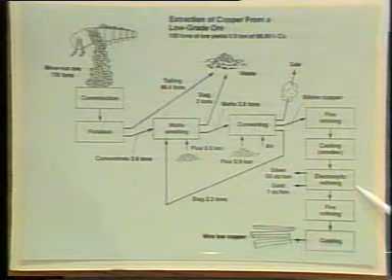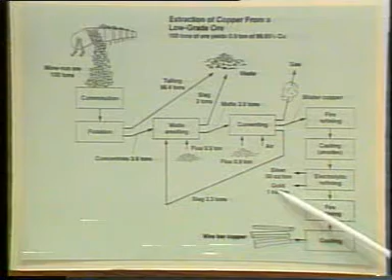An electrolytic refining plant may be as big as an acre. We hang anodes in sulfuric acid containers, and between each one we put a starting sheet of pure copper that we've gotten down the line. Then we pass a current through it, and we get plated from the anode, which is impure, to the cathode, now pure copper. In the process, we drop out all the noble metals, the selenium and the tellurium - gold, silver, platinum, palladium, rhodium, iridium, selenium, and tellurium.

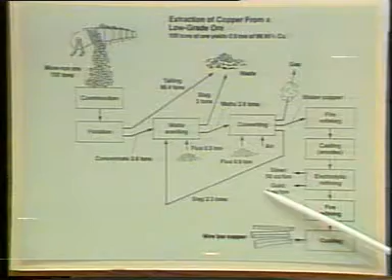When ASARCO used to have its plant in Baltimore, they used to refine about 400 tons of copper a day, and out of that 400 tons, they got enough selenium and tellurium to pay for the operation - or at least so they said. At that time when gold was selling for $35 an ounce, they still got $18,000 worth of gold out of each 400 tons, plus lots of silver and other nice things.

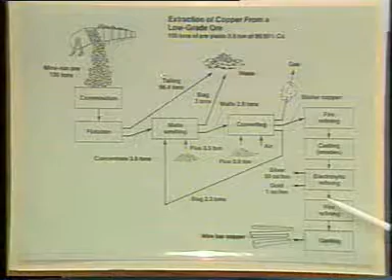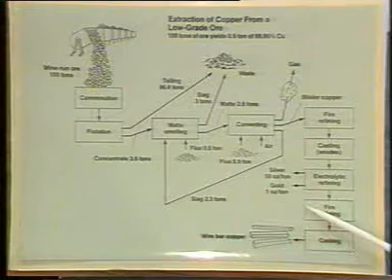But when they're through with this, all they really have is a bumpy looking plate, about the size I am - about 5 feet tall and 3 feet wide. That material is going to be bubbly and blistery looking. It's going to have some hydrogen in it because we're also going to decompose the electrolyte a little bit and plate it with some hydrogen. So we put it back in a casting house, melt it again, and cast it.

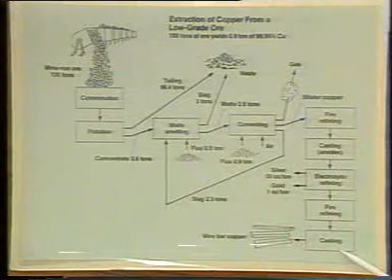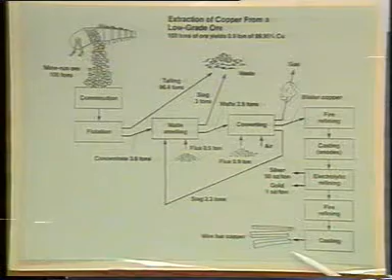When we cast this material, we have an option of casting it in little ingots like pigs of iron, which we do. We could cast it in bars that are amenable to processing - rolling and drawing and making tubes of it. Or we may cast this material as one continuous bar - continuous casting.

Now I'm going to describe continuous casting for you with copper, although I hope you realize that continuous casting is now carried out in the steel industry as well. So back when we were talking about refinement of steel, we could have had continuous casting there too. But let's talk about the copper process.

One question about electrolytic refining: why do you try so hard to get the sulfur out if you're then going to drop these billets of copper into sulfuric acid? It seems like any extra sulfur would just disappear into the solution when you're electrolytically refining it. You're asking if I can win the material from the solution by just electrolytic plating - and the answer is yes, I can. It just turns out it's more expensive to do it that way. This system is the cheapest way to do it. You could do it another way - you could take the ore, get the copper ions out of it in solution, and plate them out of the solution. You could do that.

Well, how about just skipping the converter step? I mean, you've already got a substantial amount of copper. Yep, and mostly the converting step is getting rid of sulfur, apparently. But isn't there going to be enough trash in it to ruin the rest of the process? So you've got to get it all out - you're going to get it to be pure copper, 99.99% copper, very pure copper. Well, we don't get it that pure until it goes through the electrolytic process.

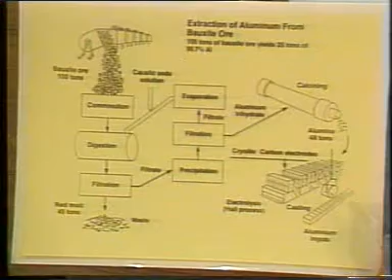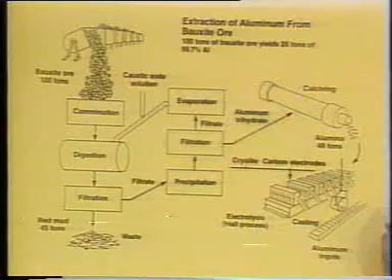Let's look at another process, the aluminum process. Many people mistakenly think we didn't have aluminum before Charles Hall appeared on the scene, but this is not so. Charles Hall did get the patents on the thermal electrolytic, or pyroelectrolytic, process for producing aluminum. But prior to that, aluminum was being made, particularly in France, and it had been identified some 40 to 50 years before that. We just had a hard time developing it into a metal.

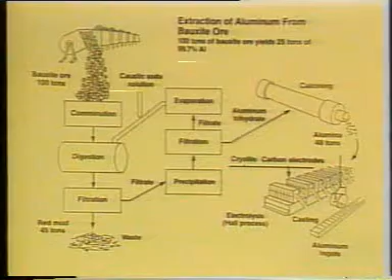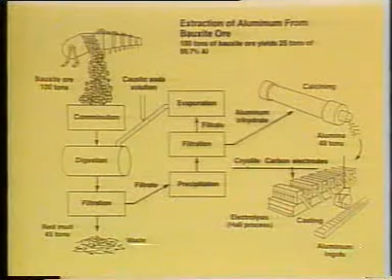That's because the heat of oxidation of aluminum is extremely high. It forms the oxide so readily that it's hard to break that bond with the oxygen. We just cannot do that directly. So we get the aluminum into a form, say a chloride, and use a material with a high affinity for the oxygen atoms. If we use molten sodium with molten aluminum chloride, we may get sodium chloride and aluminum out of it. Not a very satisfactory process, but it would work.

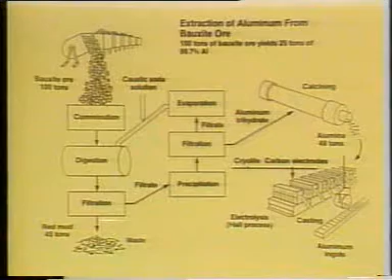So we find that in France they produced aluminum before Charles Hall did. In fact, the first aluminum ever produced at that time was a precious metal—nobody had ever had any before. They made a baby rattle out of it, which is still part of the crown jewels of France. Eventually they were making a good amount of this kind of aluminum in this country too, and the cap on the Washington Monument in Washington, D.C. is made of aluminum, cast not by the Hall process but before that, in Philadelphia.

So we did have aluminum, but we couldn't get the price down—it was very, very expensive to make. What Charles Hall did was find a way to produce it very cheaply, and founded what is today the Aluminum Company of America.

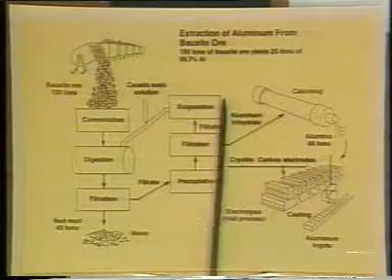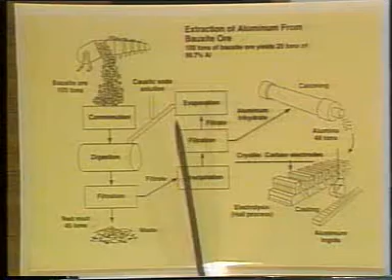Let's look at the extraction of aluminum briefly and see what we're going to do as a necessary first step. If you want to refine aluminum, you have to refine the ore to oxide. We've been talking about doing that right along, even with gold. So on this part of the chart, we have a process that primarily has to do with purifying the ore, not getting the metal into elemental form.

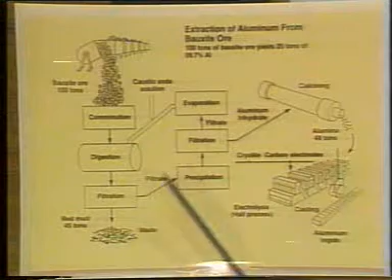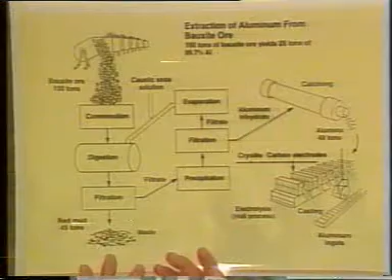The trick here is using the ability of sodium hydroxide to dissolve aluminum oxide. As I told you in an earlier lesson, if we had a sphere of aluminum that was a single crystal and dropped it in sodium hydroxide, the sodium hydroxide would dissolve the oxide from the surface, corroding it, but it would eat it back into a little cube, since that's the shape it's most likely to occur in, a cubic form. That says there's a process for dissolving aluminum oxide.

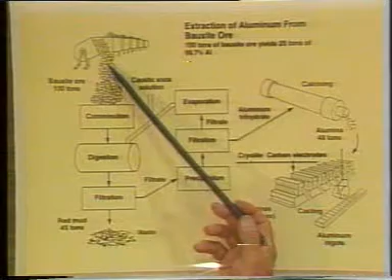And the process is called the Bayer process, spelled just like the aspirin, Bayer, except it's the Bayer process. In the Bayer process, we take the bauxite ore, which is a combination of iron oxides, silicon oxides, and aluminum oxide.

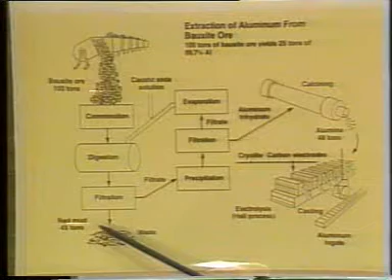We treat it, grind it up first so we can dissolve it, and then digest it with sodium hydroxide, caustic soda solution. We take this caustic soda solution, which contains the alumina as sodium aluminate, and we filter it. What we filter out is a red mud, which contains almost all of the silica and virtually all of the iron, because these materials don't dissolve readily in the sodium hydroxide solution at the concentrations we have.

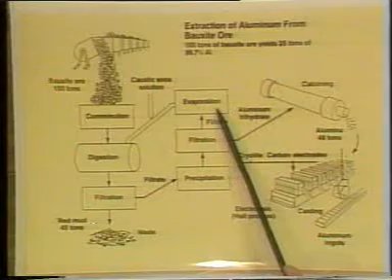Having filtered it out, we have to precipitate the aluminum oxide from the solution in a precipitation tank. We filter the material, then evaporate off the sodium hydroxide solutions, which are carried back to the digester, and this continues over and over and over.

So somewhere out there where the ore is concentrated, Jamaica or wherever it might be, we have digestion plants that digest the bauxite ore and produce this very beautiful, pure white powder that is aluminum oxide. That is necessary if we're going to refine aluminum, because it's almost impossible, once something gets into the aluminum, to take it back out.

We take this aluminum oxide, which is wet, and we calcine it. The calcining operation is what we discussed before, where we just drive the water off, and essentially we get the alumina out.

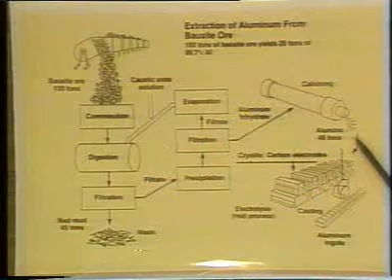This alumina, we're going to use the Hall process. All Charles Hall did was find out—well, he knew beforehand that he couldn't melt this aluminum oxide, its melting point is very, very high. If he gets it molten, he can just electrolyze the aluminum out of it.

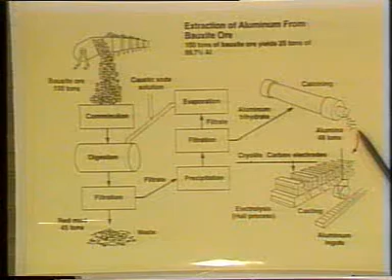So what he found out was, if he uses cryolite, which is a sodium aluminum fluoride, a mineral we can produce synthetically but also find in nature—if he took this cryolite material and put the aluminum oxide in it, it would dissolve. Then we can plate out the aluminum electrolytically from this molten cryolite bath with the aluminum oxide dissolved in it.

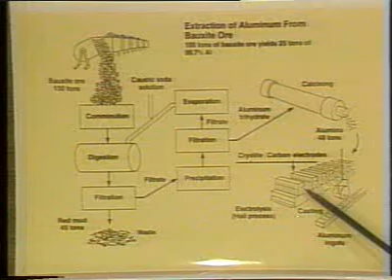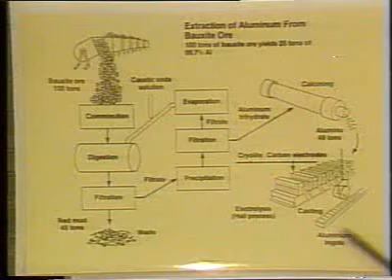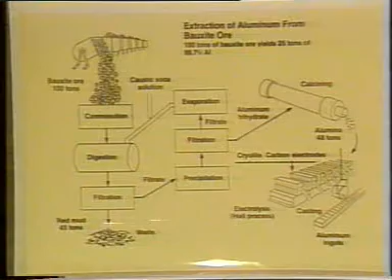When we do that, the aluminum falls to the bottom of the pot. The top, which is on a carbon electrode, receives the oxygen when we break up the aluminum oxide, and it burns and supplies some of the energy to keep the pot hot so we can handle the molten aluminum. We tap out the aluminum and cast it into ingots, or continuously cast it, or make it into powders, or roll it into structural shapes. So that's the Hall process, also called the pyroelectric process, or the thermoelectric process.

But let's for a moment look at a little problem that Charles Hall had. I think it's interesting to look at this because it helps us appreciate the problems we have in a lot of industry today.

Actually, Charles Hall was a very meticulous man, and he's not the first person to discover how to refine aluminum by this process. The man who learned to do this is Héroult, a Frenchman, and he was a pyroelectric man, worked in that field.

But there's a difference in the personalities of these two men. Héroult was a man given to having a good time. He didn't worry about keeping notes—I guess he wrote them on the cuffs of his shirt and then they got washed away. He was a ladies' man, forever carousing around, I understand. So he wasn't a good bookkeeper.

But he did invent this particular process. Charles Hall independently, very shortly thereafter, invented the process. He's the son of a Presbyterian minister, very meticulous, kept notes. The first Sunday he succeeded in doing this, he got a little tiny piece of aluminum. He wrote a letter to his sister and sent her this piece of aluminum, saying, look what I did today—it's a precious metal now, remember, up there.